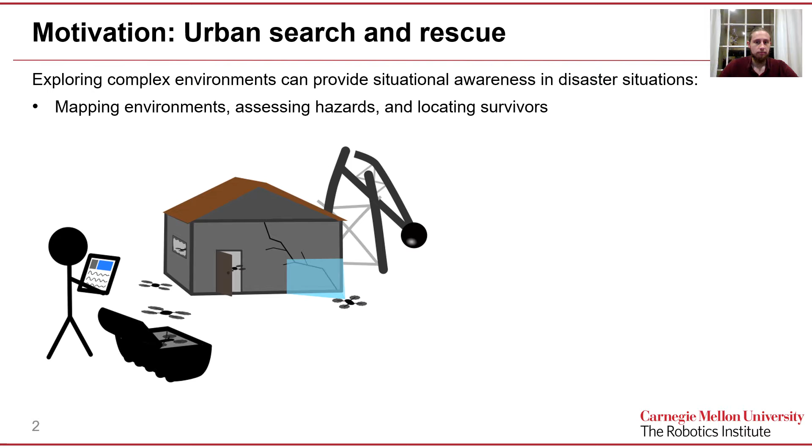Subterranean search and rescue is also the subject of the DARPA Subterranean Challenge, and I am currently competing in the competition with Team CoStar at JPL. In this talk, I will focus on teams of robots mapping the geometry of free and occupied space in unknown three-dimensional environments using onboard LiDAR or depth cameras.

And when I talk about exploration with volumetric objectives, what I mean is that robots can explore complex environments quickly by maximizing the amount of unknown or unobserved space covered by future observations, say over a horizon of several seconds. Here, we see a robot observing some of the unknown space, which may turn out to be free or occupied, which is shown in gray.

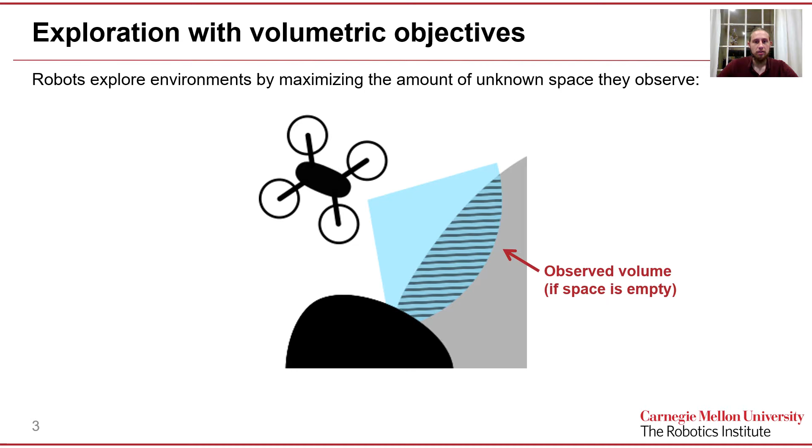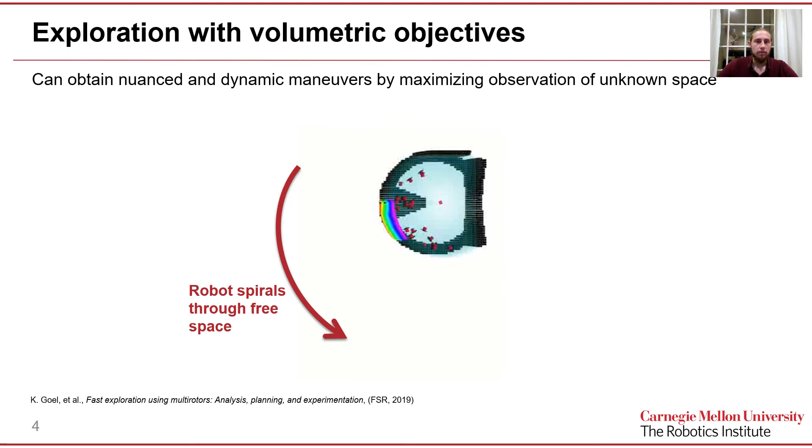By maximizing the amount of unknown space the robot will observe, we can obtain interesting and dynamic maneuvers, and this is something that I find quite exciting. So here we see a robot executing a sort of spiraling motion to quickly and safely cover the unknown space, and we obtain this by optimizing trajectories to maximize a volumetric objective.

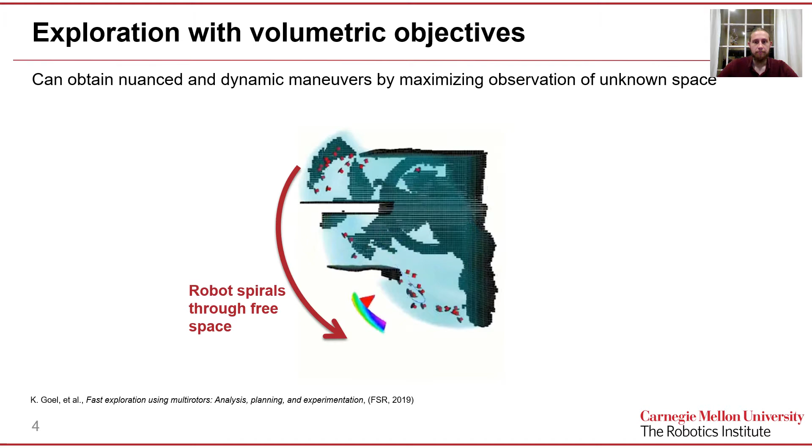In this presentation, I will present expected weighted coverage as a general volumetric objective for robotic exploration, and I will apply expected coverage to unify certain information-theoretic and coverage-based objectives. Specifically, I will look at mutual information without noise. I will then go on to present a few applications and experiments.

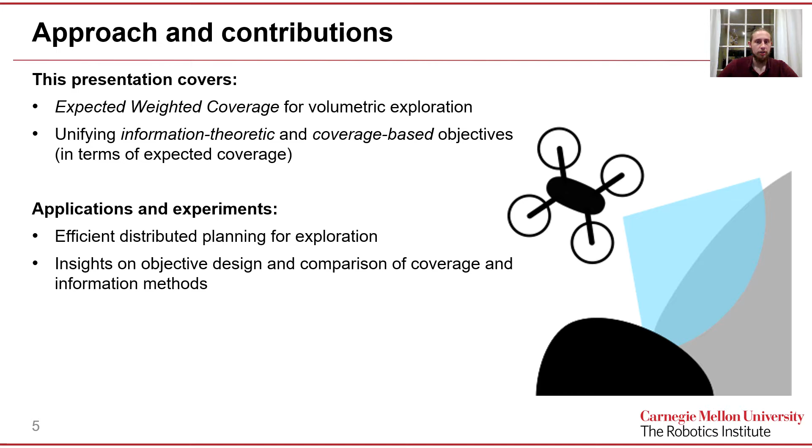First, expected coverage will prove to be a useful tool to enable distributed planning for multi-robot exploration. Then, I will discuss some insights into objective design obtained via interpreting objectives in terms of expected weighted coverage, as well as a brief comparison of existing coverage and information-based methods.

For context, recent works on exploration apply a variety of different objectives that each capture the value of observations of unknown space from a given camera view in slightly different ways. Coverage-like objectives emphasize the part of the environment covered by an observation. In general, coverage objectives are simple, practical, and easy to implement, and later we will also show that coverage objectives perform well in practice.

Mutual information objectives for mapping with depth cameras seek to model reduction in uncertainty in the map explicitly, and information-based methods have been the subject of numerous recent works focusing on topics such as analysis and algorithm design. In the following slides, I will draw a number of connections between these two classes of methods in terms of expected coverage. Additionally, I will present what I believe are the first published results comparing coverage and information methods.

One example of a coverage objective, one of the simplest and most common, is what I like to call optimistic volumetric coverage. With optimistic coverage, robots are rewarded according to the volume of unknown space covered by their hypothetical future observations, assuming optimistically that all of the unknown space is empty, which provides the maximum possible reward for a set of camera views.

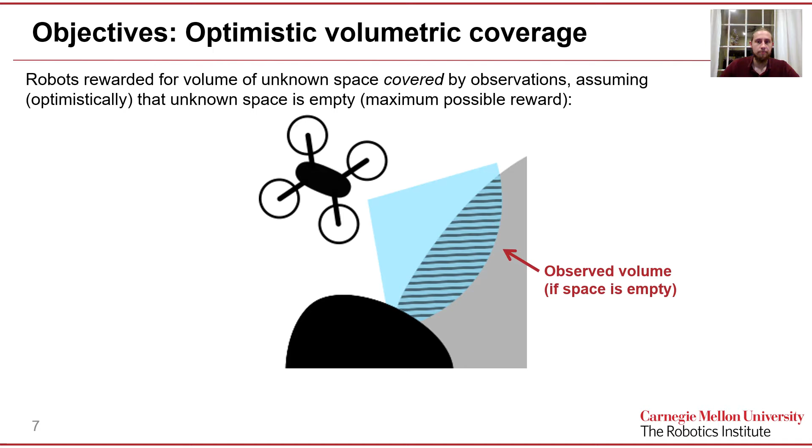Changing tracks to information-based objectives, many information-theoretic objectives are based on some form of mutual information. Mutual information characterizes how much information observation of one random variable will provide about another. As written here, the mutual information provides the expected reduction in uncertainty in the map X after obtaining the robot's observations y1 to yn.

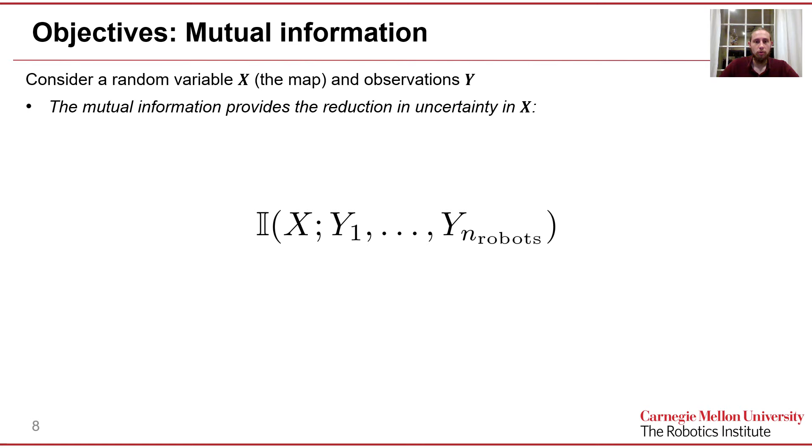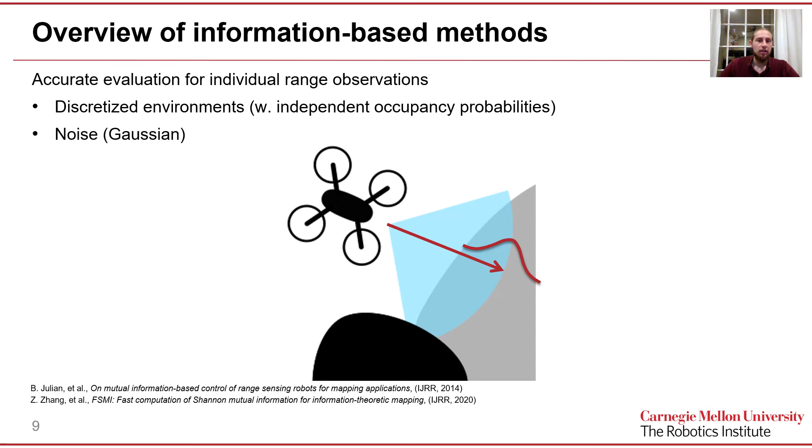What is great about information-theoretic objectives is that we are often able to evaluate mutual information for individual range observations in closed form. Specifically, we can do so for discretized environments with independent occupancy probabilities, like occupancy grids or as in OctoMaps, and with additive noise, typically Gaussian.

However, we generally have to approximate mutual information for observations involving multiple rays or camera views. One way to do so is to compute a sum of exact values for nearly independent rays, like so. While summing rays as such is a useful approach, approximating independence leads to some difficult trade-offs, and it is unclear how accurately this and other methods are able to approximate mutual information for multiple views, either along a trajectory or for observations by teams of robots.

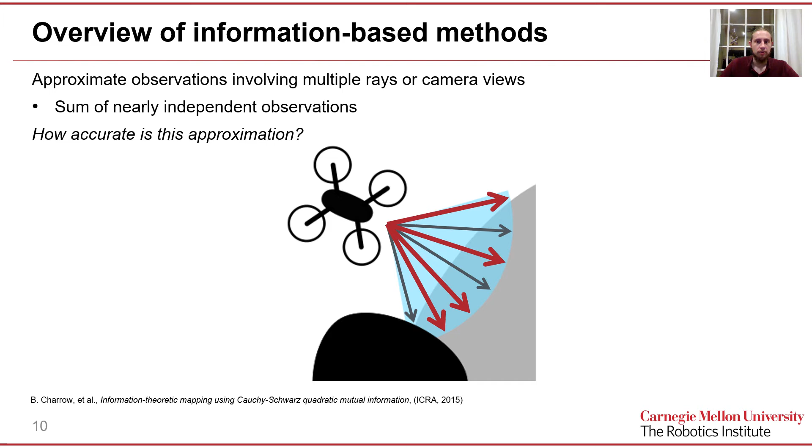Going into a little more depth and regarding noise in range observations, recent work by Zhang et al. compared different information-theoretic methods and noise models and did not encounter a significant impact on exploration performance.

This led Henderson to develop a method for evaluating mutual information that assumes little noise, and that small noise assumption can be justified given that the noise in range observations, typically on the order of centimeters, is often small compared to the scale of the discretization and the maximum range of the sensor.

I will also add that Henderson's work solves some challenges for evaluating one or more camera views, but we'll not have time to go into more depth on that subject in this talk. This leads us to the model of mutual information we study in this work. Like prior works on this subject, we assume a discretized environment with independent probabilities of cell occupancy. And following the line of Henderson's work, we will assume noiseless observations of the distance to the nearest occupied cell.

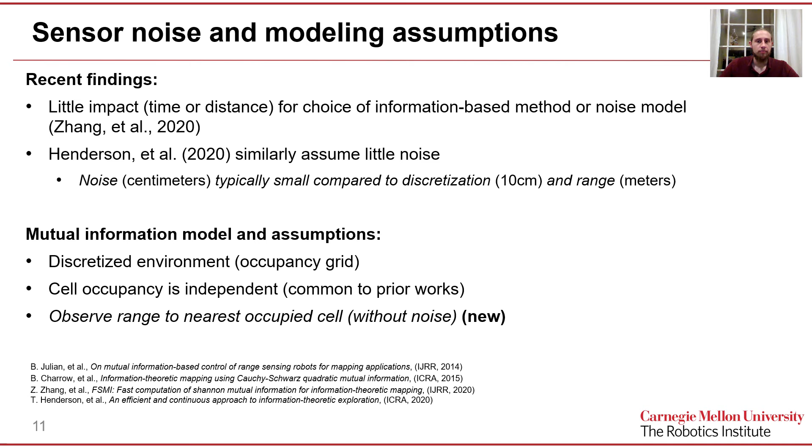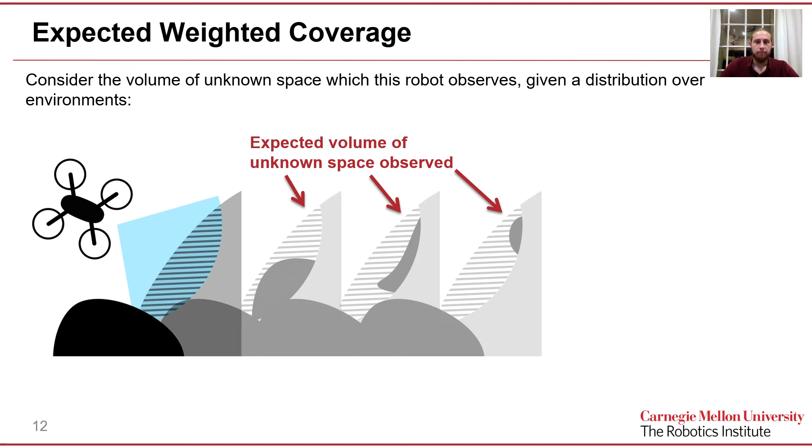Now we can characterize both coverage and information-based objectives in terms of expected weighted coverage. Here, consider the volume of unknown space a robot observes from a given camera view and for a distribution over different possible realizations of the environment in the unknown space, like so. More generally, we can define a set of non-negative weights which represent rewards for observing each cell in the environment. And the expected weighted coverage objective is the expected weight of cells observed for a collection of camera views, as shown here.

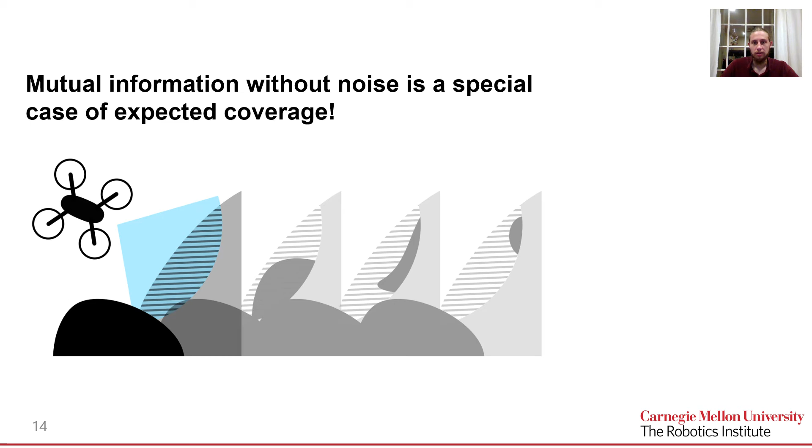Now, let us begin to apply this result. Interpretation as expected coverage can be used to prove functional properties of mutual information and other objectives relevant to distributed perception planning for multi-robot teams. Specifically, we present results and analysis for a method of distributed submodular maximization developed as a part of my thesis work.

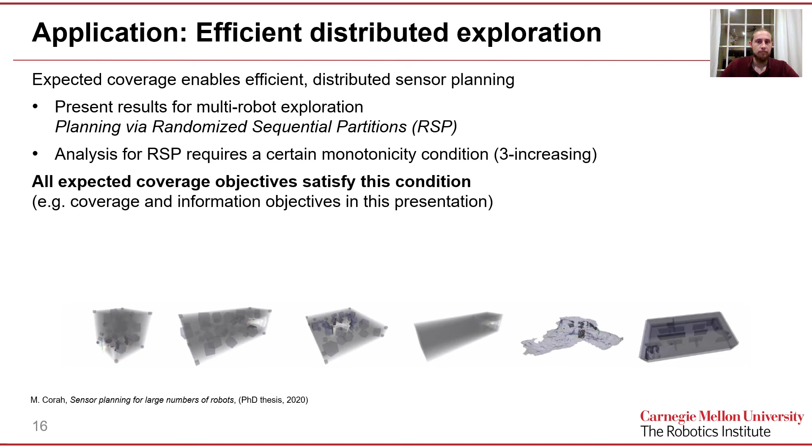More broadly, the framework of expected coverage can be used to model a variety of objectives for volumetric exploration and active perception tasks. To begin, the optimistic coverage objective I described earlier can also be written as an expected coverage objective by assuming unknown space is empty with probability 1. Likewise, optimistic coverage is equivalent to mutual information without noise when the prior probability of occupancy for unknown cells is small. And additionally, the mutual information can be approximated by obtaining trivial upper or lower bounds on the probabilities of observing each cell in the discretization.

To conclude, in this talk, I have presented expected weighted coverage as a framework for studying volumetric exploration objectives. Our contributions regarding expected coverage are notable for enabling distributed multi-robot planning for exploration, as well as unifying coverage and information methods, and leading to various insights regarding objective design.